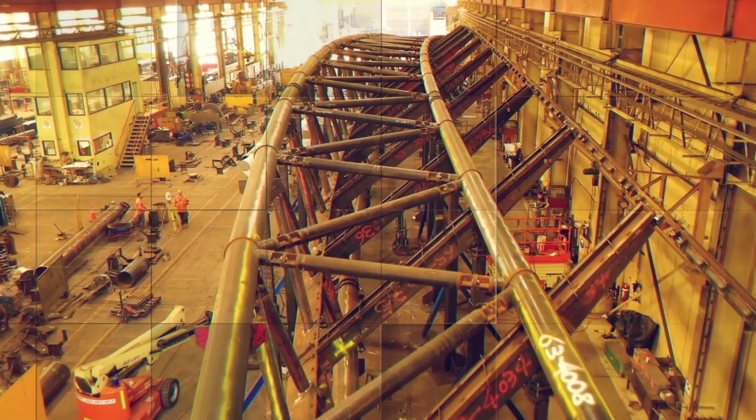Okay, let's proceed to our first category. Buildings, large projects. The shortlisted entries for the Buildings, large projects category are Allianz Stadium. The roof form and geometry are one of the most technically complex stadia roofs in Australia. It's lighter than traditional stadia, using up to 40% less steel, creating a more sustainable project. To achieve this result, the 2,000-tonne roof structure is shaped as a synclastic diagrid shell. This is being supported by 4 corner super columns, derricks.

Between the derricks are inner-arched trusses which span 140 metres and 90 metres in length, connected by large 260mm diameter pins. The structural design includes an outer tension ring and underlying columns which connect and support the roof to the stadium bowl steelwork.

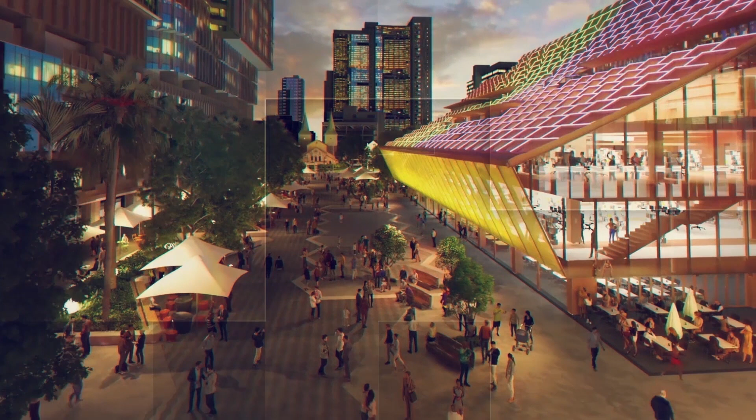5 Parramatta Square. The innovative triangular shape design is sculpted to match the course of the winter sun. A bespoke structural steel roof frame supports the envelope of the building, forming both the roof and facade. The structure comprises a series of framed portals running up the cascading floor plates with regular supports. Within the building, tessellated floors facing the square cascade downwards in an amphitheatre style, each with views to the square below. The city landmark comprises a library and cultural facility filled with community and exhibition spaces, as well as the City of Parramatta's council chambers.

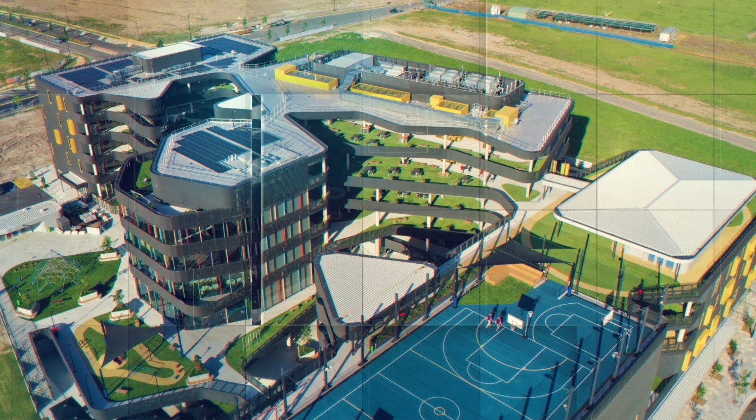Santa Sophia Catholic College. The college is a $150 million co-educational school accommodating up to 1,920 students. By embracing the principles of design for manufacture and assembly, a quick-build structural scheme was implemented. The school classroom modules were built from multi-storey structural steel framing with unpropped long-span metal deck flooring. This allowed for next-day fit-out to start in the classrooms following concrete slab pours. The use of steel was embraced across the project with architecturally exposed structural steel elements featured throughout the school.

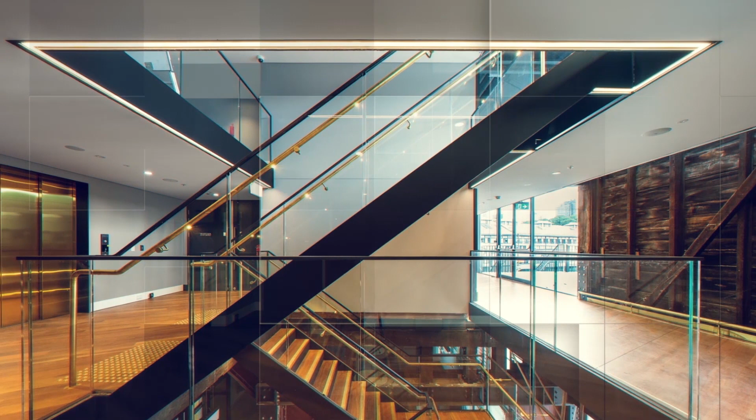Walsh Bay Arts Precinct. The heritage Walsh Bay Arts Precinct's existing structure had stood for over 110 years, and many elements of that structure were in poor condition. Steel reinforcement of the original timber structure was the only solution. Engineers were required to design special sections which would fit into the limited spaces. Limitations included trucks to 6-ton capacity and 8 metres long.

Almost 2,000 tonnes of steel then had to be moved virtually one stick at a time along the timber deck on trolleys pushed by manpower. In addition, barges were used to bring in larger 3D structures which were lifted into situ with barge-mounted cranes.

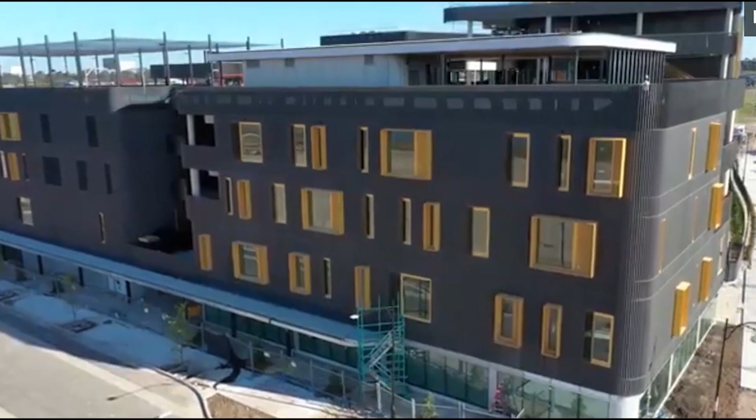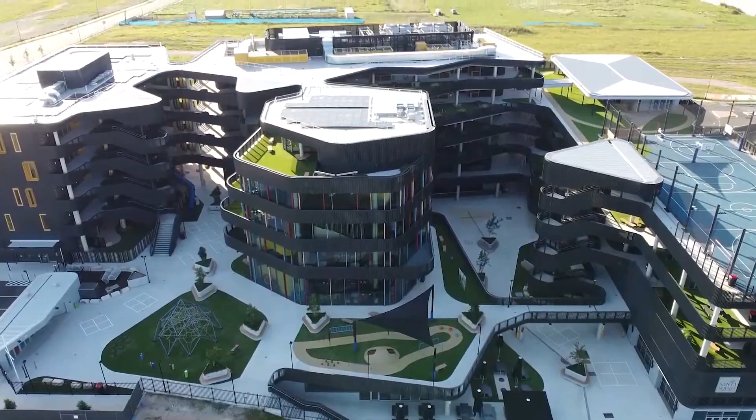The judges awarded a high commendation in this category. The high commendation is awarded to Santa Sophia Catholic College. Congratulations to Santa Sophia Catholic College.

And now for the winner of Buildings Large Projects for 2022. Allianz Stadium.

There's a lot of clever engineering that's gone into the structural engineering design, which has been fascinating. But what really strikes me is, at the end of the day, the simplicity and elegance of what we see when you stand here and look around is what's really special.

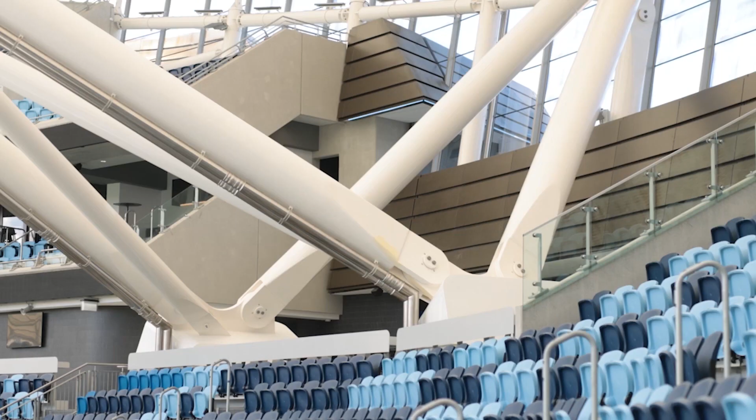Approximately 85% of all the steelwork of the roof was put together down here on the pitch and lifted into position. So the reason we modularise construction like that is to really minimise the time that you have to spend at heights. It's a safety thing as well as a time thing. So we really tried to design a smart system so that every single module was stable and could be lifted into position and done really quickly.

There were many aspects of teamwork and collaboration that were crucial to the success of the project. I mean, at many different levels, starting from our relationship and work we did with John Holland, listening to them, understanding what was important to them, to then work with them to achieve the outcomes, and then in parallel the clever engineering we did with our project partners, and then internally within our own teams, having the work being delivered from nearly 10 offices. All of these required collaboration and teamwork for where we've ended up today.

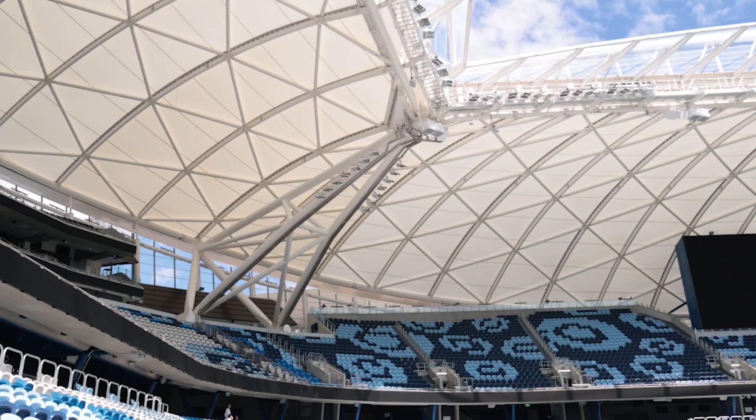So if you look at the roof and you see how complex yet elegant it is, steel is what makes that roof and makes it so special. Look, being recognised by your peers or industry for excellence is always very humbling. But I'm really proud to have been part of the team that has contributed to leaving this legacy which will be enjoyed by fans for years to come.

The next category is Building Small Projects. The shortlisted entries for the Building Small Projects category are Ashfield Aquatic Centre. This stunning centre provides a mix of community leisure and elite sports, housing 4 indoor and outdoor pools, a spa, sauna, steam room, gymnasium and cafe.

The complex steel design included 200 tonnes of structural steel and a high-end 3-coat protective coating system. The architectural intent for the main rafters was a fully boxed section which was manufactured from cap-plated universal beams. Due to rolling constraints and to meet architectural intent, the columns were manufactured from plate and assembled in the factory. Transport and site constraints meant that additional splice connections were required for the safe passage and installation of the steel.

Brewery Yard, Central Park. The creative and adaptive reuse of the former Irving Street Brewery offers a clear demonstration of structural innovation. The approach was to utilise as much existing structure as possible to help reduce construction costs and improve program times. The striking front facade of Building 30 consists of an existing 10-metre deep structural steel truss. The design incorporated this truss and other adjacent existing structural steel frames to form the structural lateral stability. Due to site access constraints, extensive analysis and coordination was carried out to ensure that the structural solution maximised buildability.

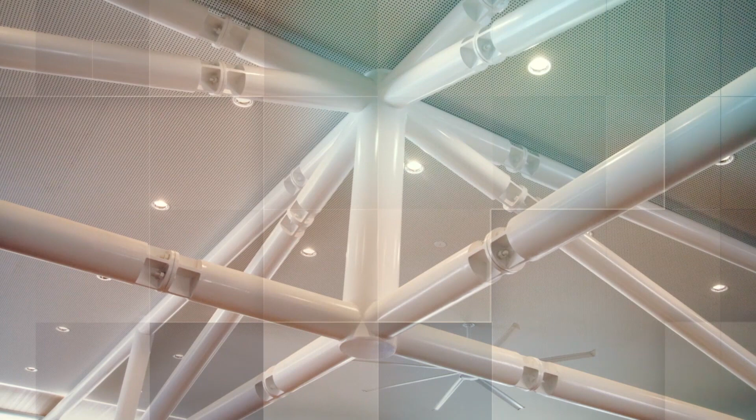Catherine McAuley Catholic Chapel. Visually welcoming, the chapel offers amenity including seating for 500, parish office, confessionals and back-of-house spaces. The development has been designed and constructed to an equivalent of 4-star Green Star standard. The intent is a reinterpretation of the traditional church within a contemporary social, environmental and economic context, and is a hybrid between a religious and community space. The large span overhangs are provided for amenity of both users walking around the building and provide passive shading. These large overhangs are held up with the large steel truss members, which are clearly detailed in form and pure white in colour.

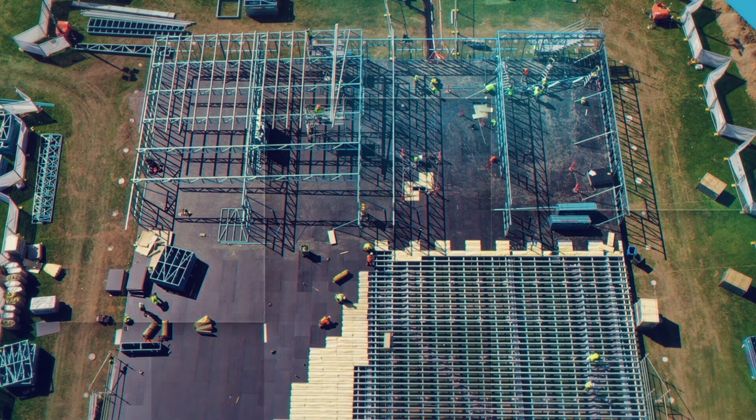COVID-19 Surge Centre. The relocatable COVID-19 surge facility was conceived and constructed with a 7-day design phase and 36-day construction time. The prefabricated floor and roof systems allowed the building to be enclosed and weathertight within days so that finishing and fit-out could begin. Design for manufacture and assembly approach offered several unique solutions to the demand of starting fabrication and construction before architectural and service designs were resolved. The light gauge steel design for the structure allowed it to be broken down again and containerised to be transported to a new site.

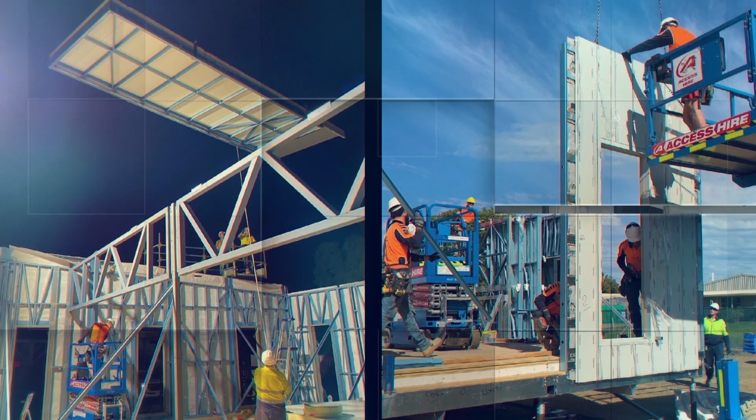CSIRO Clean Lab. The CSIRO required a new clean lab for their research centre on a leased site in Narrabri. Specific complexities of the project included laboratory conditions requiring the building to be airtight and the floor to have extremely low vibration tolerance, wall panels up to 6 metres high which required a custom solution for transport and delivery. The building also needed to be easily disassembled for removal from site at the end of the lease. Solutions included a prefabricated floor system, light gauge steel wall frames, prefabricated facade and roof panels, all providing a fast build time and accurate results.

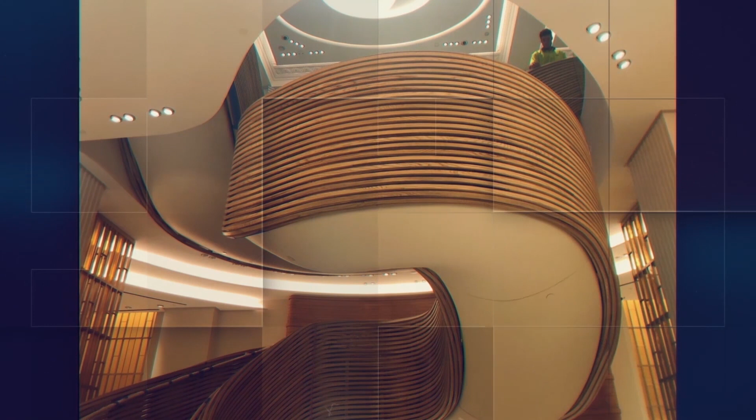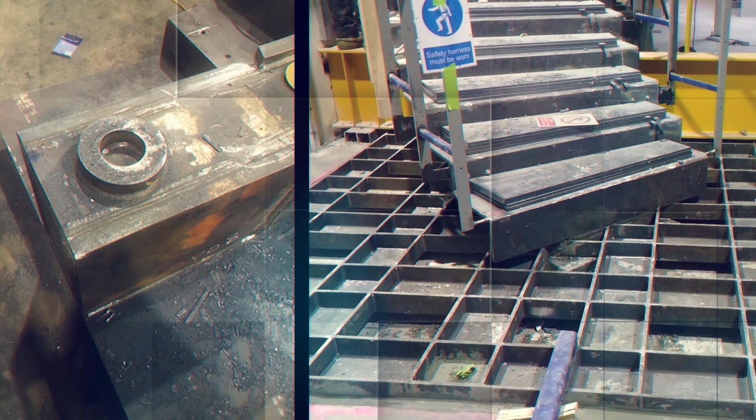Floating designer store staircase. The project's main design feature element involves the design and documentation of a very ambitious self-supporting helical structural steel stair which spanned the height of 2 equivalent stories. This required 2 suspended floating landings for BCA compliance and then separated into 2 independent flights at the upper transition. The design detail introduced a series of tuned mass dampers which were able to rectify dynamic issues while still achieving all of the design objectives. This is a wonderful example of excellence in steel design, engineering and construction while dealing with the constraints of an existing heritage-listed building.

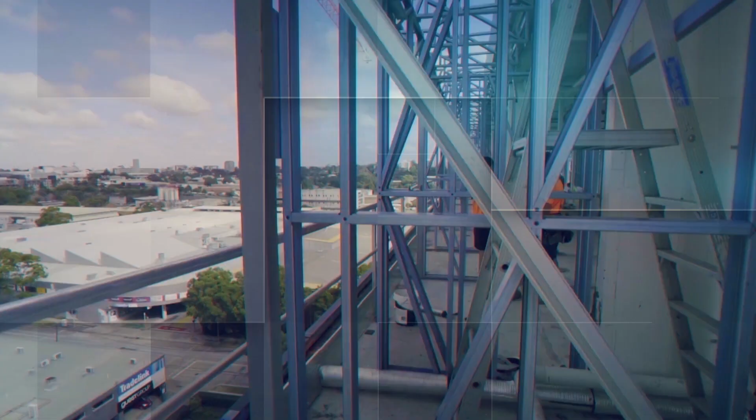Northside Clinic. How do you build another level on top of an operational health facility without disrupting the running of the facility or disturbing the staff and patients? By utilising a design for manufacture and assembly approach, the scope included prefabricated facade panels to the top level to match existing and top-level prefabricated wall and roof framing to sit on the existing roof slab.

The prefabricated facade panels with box window detail were framed off-site, assembled and clad on-site at ground level, lifted into place and fitted from the existing roof level. This resulted in limited preliminary site costs, truck movements and waste.

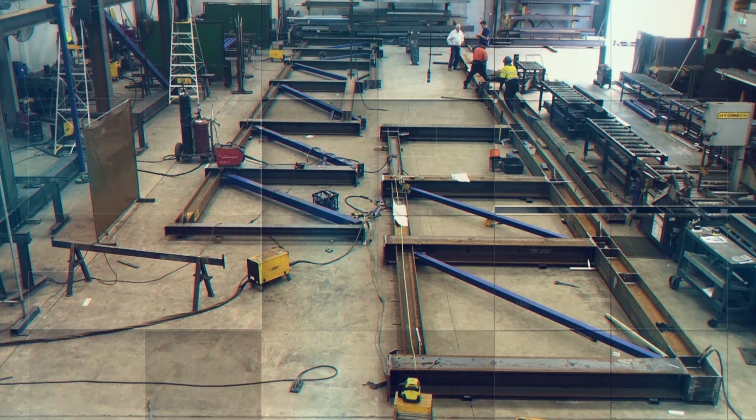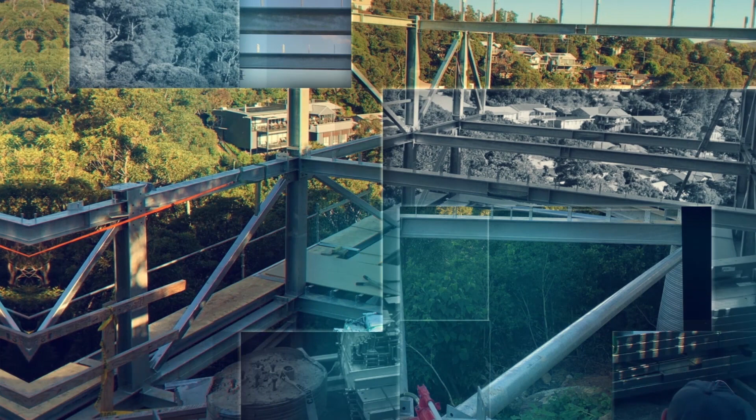Oceano. A spectacular location set the scene for an ambitious cantilevered house designed to float above the tree line. Fabricated trusses for the long sides of the home created the double-storey structural walls. The built-in platforms around 3 sides of the house also negated the need for any scaffold.

Once the first level of trusses and secondary members, including cold-rolled joists, were installed, the flooring then created a safe working platform. With its proximity to the ocean, all structural elements were galvanised. BIM models were shared for collaboration and a 3D model used for erection.

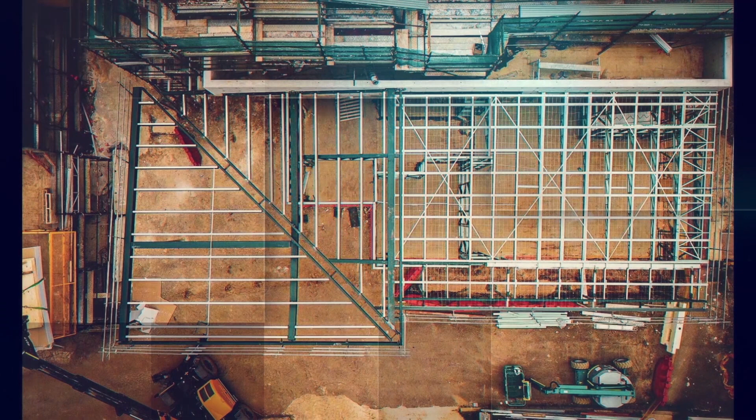Opal Glenmore Park. This intricate project is a perfect example of applying solutions of structural and light gauge steel in combination, maximising the architectural feature and achieving high productivity and cost efficiency. Utilisation of a high-level BIM model with integration of lightweight and structural steel set the platform for seamless coordination with consultants and the builder and has minimised error and cost on site.

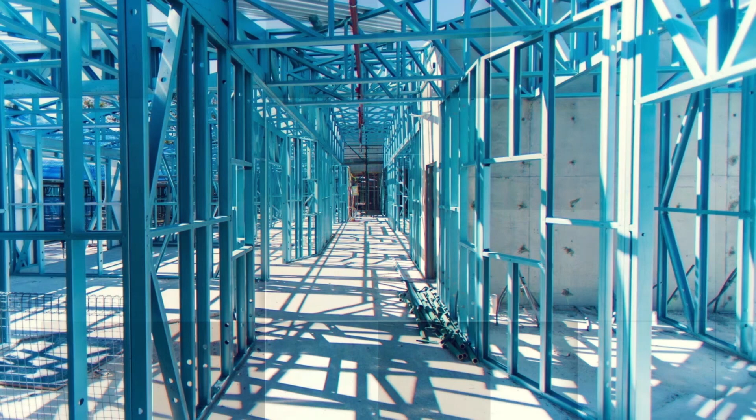A lightweight purlin design for an efficient ceiling void provided flexibility for services, while the rim beam design is fully compliant to fire rating regulation and achieved great cost reduction in engineering.

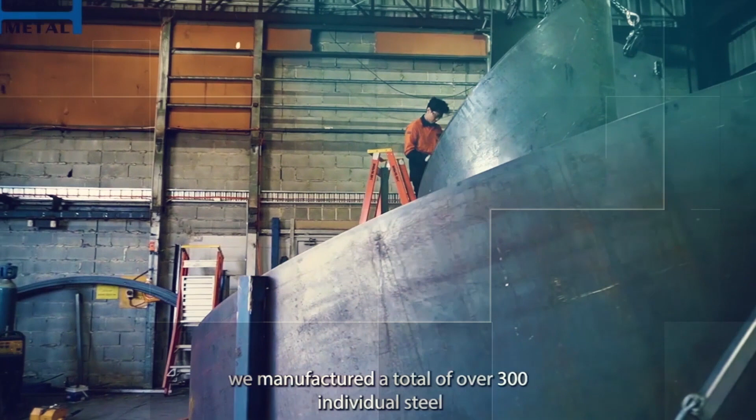Quay Quarter Tower Spiral Stair. Quay Quarter Tower is the redevelopment of the former AMP Tower at 50 Bridge Street, Sydney. The design required the fabrication and installation of 3 sets of spiral stairs, the largest of which spans 9 floors and forms the architectural centrepiece of the 21 to 29 floor atrium.

The design and drafting team commissioned a 3D printed scale replica of the stair sections based on the BIM model. This was used to design a custom lifting rig which could hold each 10-ton asymmetrical shaped section of stairs in perfect balance, and also calculate the logistics of transporting these huge sections.

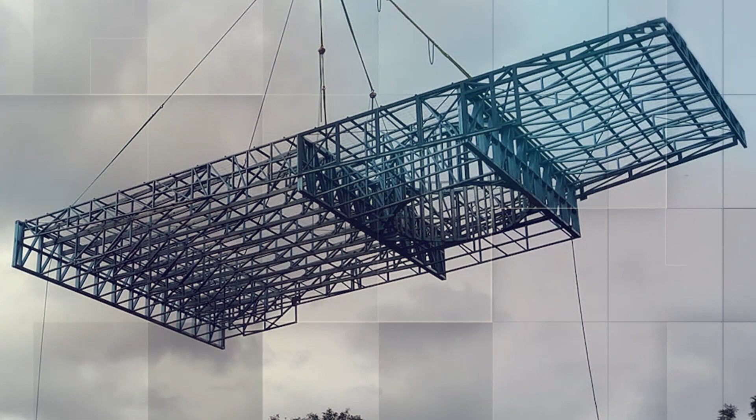Smalls Road Public School. School design is reaching new levels of creativity in construction, and light gauge steel framing solutions in tandem with design for manufacture and assembly is helping the project team to compress build times and cost milestones. A cleverly designed panelised framing system allowed building works, slabs and structure to be constructed on site, whilst the wall and roof framing was being fabricated off-site.

The roof framing was designed to be installed in large panels via crane, and wall framing was fabricated in panels to speed up installation time. Waste was minimised by designing and fabricating off-site using precision drafting and manufacturing software.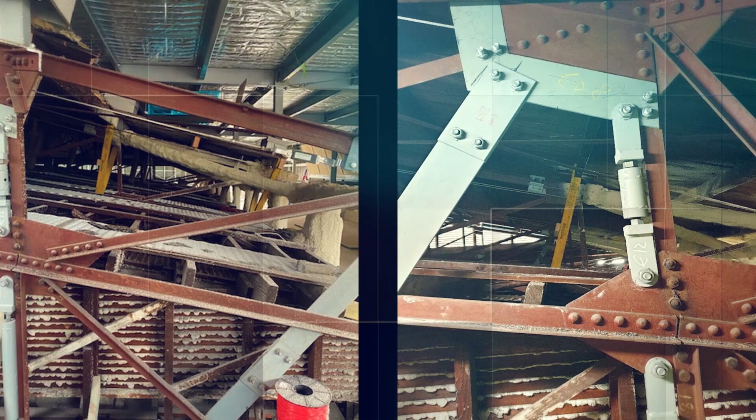Yirranma Place. This project involved the restoration of the existing 1927 heritage building and additions to transform the structure into a collaborative office space and community hub. Works included strengthening the existing steel skeleton structure, particularly the 34-metre roof trusses, to withstand higher loads of the additional office space.

Supporting the existing building using a temporary configurable truss structure for excavation of the basement. The design and implementation of a transfer structure to remove an obstructing masonry wall which was 14 metres high and 48 metres wide, and design the seamless transition from the old to the innovative new.

The judges awarded a high commendation in this category. The high commendation is Quay Quarter Tower Spiral Stair. Congratulations, Quay Quarter Tower Spiral Stairs. And now for the winner for Buildings Small Projects 2022.

Oceano. The most challenging aspect of this project, but also what we're most proud of, is the installation. Typically installing steel on the side of a hill is challenging enough, but throw in a battle axe block, one-way tight access, no room for EWPs, 55 tonne of steel with sections weighing up to 5 tonne, and a cantilevered house, we had our work cut out for us.

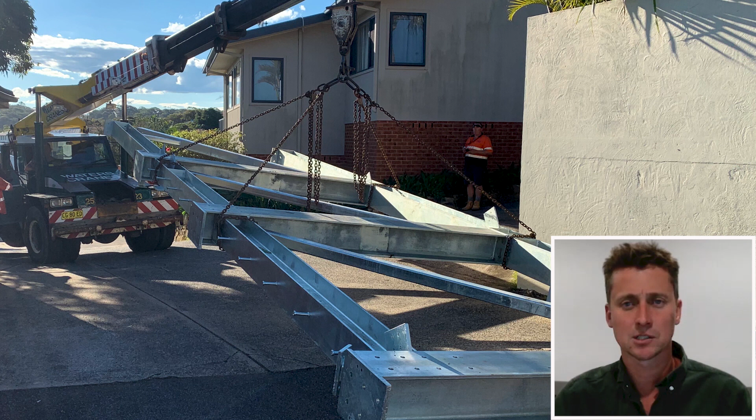The site was perfect for steel. Large, prefabricated, welded truss sections could cantilever over the tree canopy. Being able to construct the truss in such large sections meant that the house could be constructed quickly and safely.

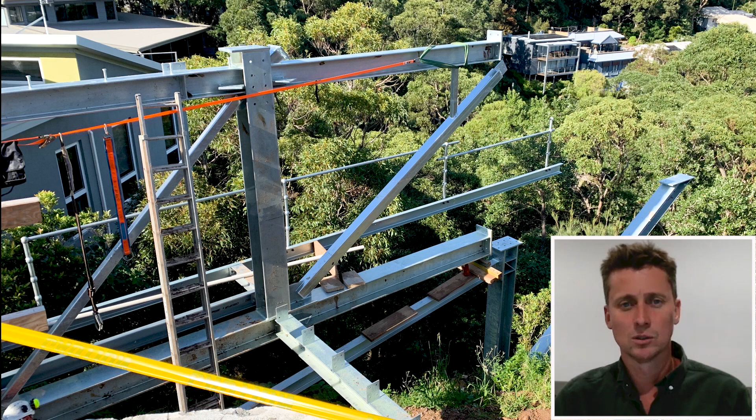To ensure ease of install, it was paramount that the trusses with multiple connection points, less than 2mm clearance for bolt holes, could be bolted together with ease. Pre-assembling the truss in the factory before welding off gave us peace of mind for a snug fit on site. Furthermore, the weight and size of the members in respect to galvanising, transport, access to the workplace and crane capacity had to be front of mind.

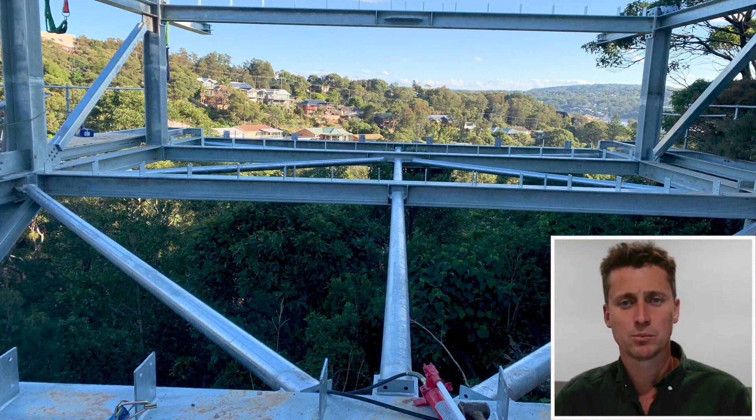Collaborating with the engineer, our detailer Innovators and the builder JCP Constructions to ensure we considered all elements from fabrication to install was vital. We thank Innovators for another perfectly detailed project and JCP for giving us the opportunity and support throughout the build. Importantly, I acknowledge and thank Coastal Steel employees, our subcontractors, including Waters, Cranes and Jeff Steer Transport, for all the hard work and problem solving.

The project was always intended to showcase steel as its primary material. Along with being the key structural element, the galvanised steel is exposed on the exterior and interior and makes for an impressive sight, as from below it appears to float above the tree line. We're extremely honoured and proud to win this award and believe it's recognition for all the hard work and many hours spent to deliver a successful project. Congratulations to Oceano.

Our next category is Steel-clad Structures. The winner for Steel-clad Structures 2022 is CSIRO Clean Lab. The CSIRO's new Research Clean Lab facility is located in Narrabri in regional New South Wales. The design for manufacture approach delivered this complex building with certainty and quality. The beauty of steel cladding not only achieved the desired aesthetics, but also provided the solutions to meet requirements for pre-assembly of the 6-metre high wall panels for transportation.

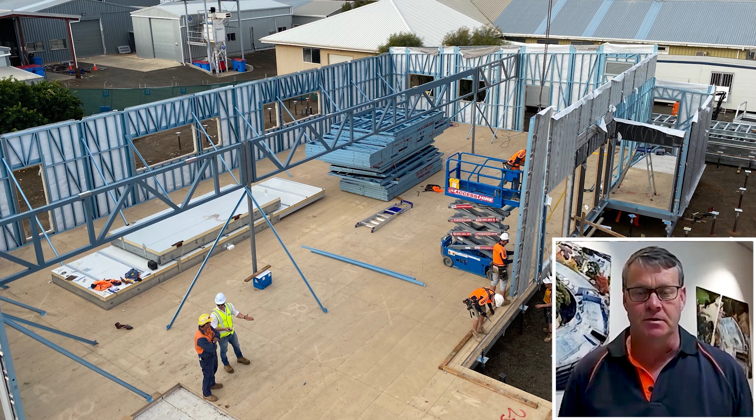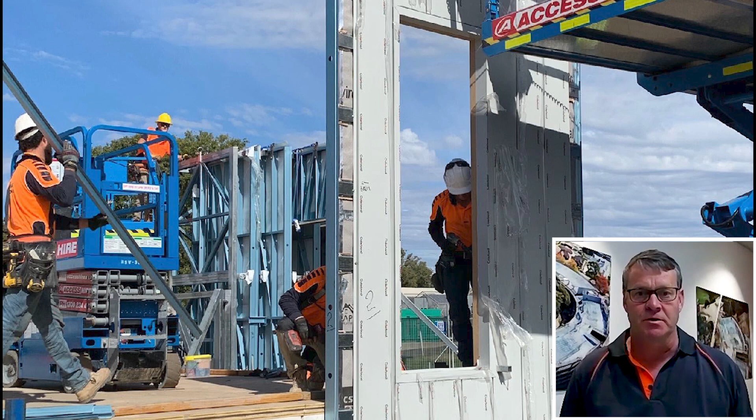This project was one of the most complex projects this business has ever delivered. We had to build a full-scale laboratory with high KPA floor loads, prefabricated in Mittagong and delivered to Narrabri in New South Wales through the depths of COVID-19. We had massive challenges with the supply of materials for all aspects of this project. We had to be highly coordinated with our suppliers for the supply of steel in this project, and the depth of our supply chain was the only way that we could accomplish this project in the time frame and to the quality that we achieved.

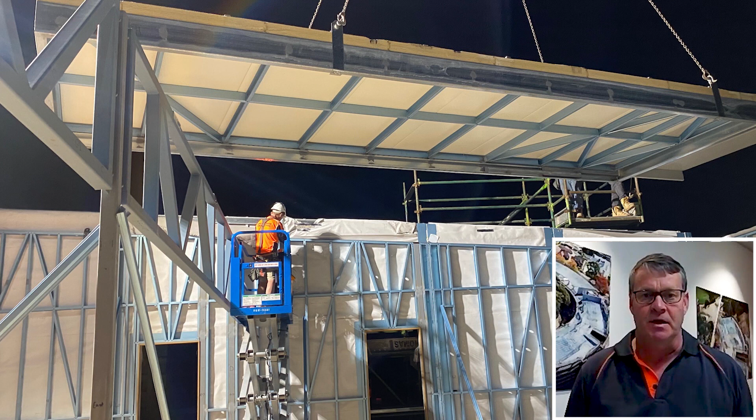Our relationship with the builder FKG was the only way that this project could be achieved with the expediency and efficiency that was delivered throughout the project. The levels of coordination with mechanical services and electrical services throughout the project made it quite difficult to accommodate, but with the work of both parties, FKG and Austrust and the other services contractors, we got to a completion of a successful project. Using steel for this project gave us the flexibility to adapt and get bigger spans and have transportable sections that we could confidently package and deliver from Mittagong to Narrabri.

We're proud to accept this award because it's a culmination of a number of years' worth of development of a direction that this business is proceeding in, and a benefit to the industry and isolated projects that are completed in remote locations with the standards and quality of what the country should expect to receive. I'm incredibly proud of our team for the process of the design and the delivery of this project. Congratulations, CSIRO Clean Lab. The sponsor for Innovative Cold Form Steel Buildings category is BlueScope TrueCore and Nash.

The next category is Innovative Cold Form Steel Buildings. COVID-19 Surge Centre, Canberra. In a time of crisis, this new 1,700 square metre health facility was conceived and constructed within 5 weeks. Prefabrication was key to achieving this extraordinary result, with light gauge steel framing providing accurate solutions for wall, floor and roof framing. The innovative steel framing also provided for the necessity to be able to disassemble the project for relocation at a future date.

Crown Towers, Barangaroo. The Crown Towers apartment project required a solution for stud walling and a curved entry wall to be clad in stone. Deflection limitations were a critical consideration for the brittle cladding joints. Significant design and testing were undertaken to address the abatement of noisy stud syndrome experienced in some structures. This included an increase in stud sizes with a complementary reduction in gauge. Additional nogging tracks to double-sided lined walls reduced the clamping action of the wall linings and minimised wall panel movement associated with possible structure movement.

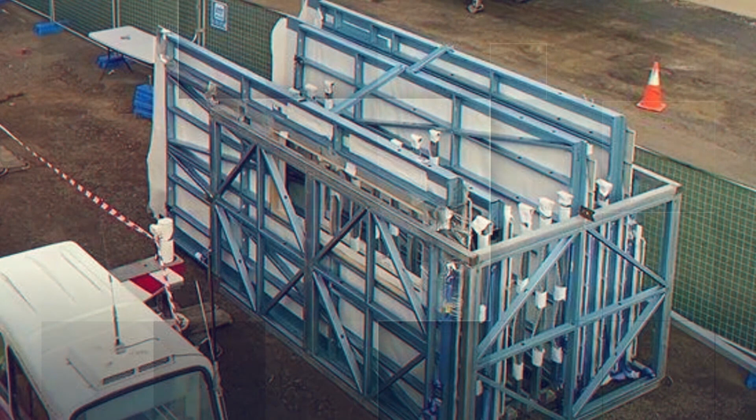CSIRO Clean Lab. With the CSIRO's requirement for a new Clean Lab Research Centre, light gauge steel framing addressed complexities of the project. Low vibration tolerances were a design necessity to meet the sensitive laboratory conditions. Steel framing was ideal to meet the pre-assembly and transportation of panels to suit the walls, floor and roofing. Specialised systems were also designed to facilitate the transport of the prefabricated kit of parts. A fast construction timetable was achieved, and smart building design provides the platform for future relocation.

Northside Clinic. The high-strength rigidity and lightweight properties of cold-formed steel has met the design intent for this prestigious facility, achieving reduced loads on the existing structure. With vibration and noise limitations critical for the existing medical practice to operate, pre-assembly of frames off-site achieves the brief. Ability to clad the facade panels prior to installation set the scene for safer installation and a speedy build program.

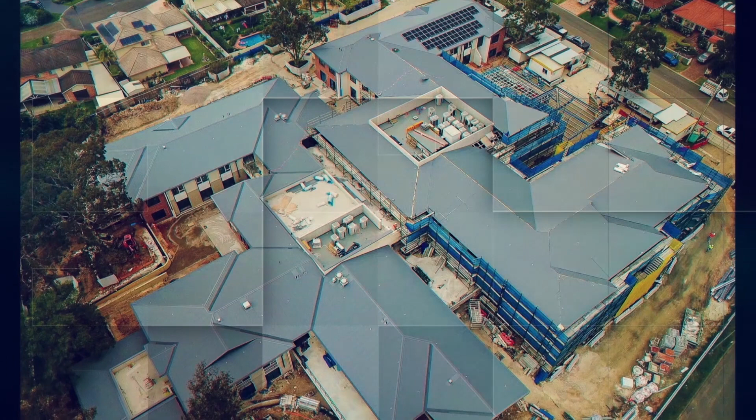Opal Glenmore Park. The combination of light gauge steel framing and structural steel has provided solutions for this large care facility. The construction design was not only extremely cost efficient, but it also provided the ease to achieve the architecturally complicated roof features. Lightweight purlins were designed to provide a greater ceiling void, creating flexibility for services. With the trend of steel design using high-level BIM models, the seamless coordination of all site participants ensures an efficient build with safer outcomes.

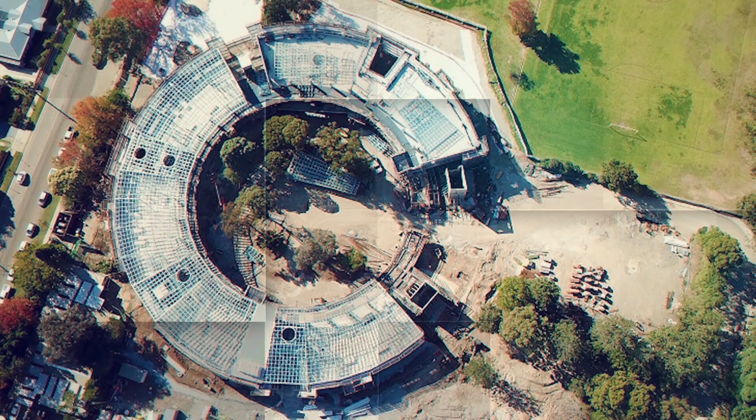Smalls Road Public School. This 3-storey circular public school set new standards for educational facilities in New South Wales. Intelligent design, incorporating a panelised steel framing system, allowed for off-site modules to be installed in quick succession. The large, lightweight roof frames were designed to be installed in sections to create the circular intent, while supporting wall frames were also prefabricated to speed up installation time. The result is an architecturally stunning facility for future generations to come together to mix and to learn. The winner for 2022 in this category is...

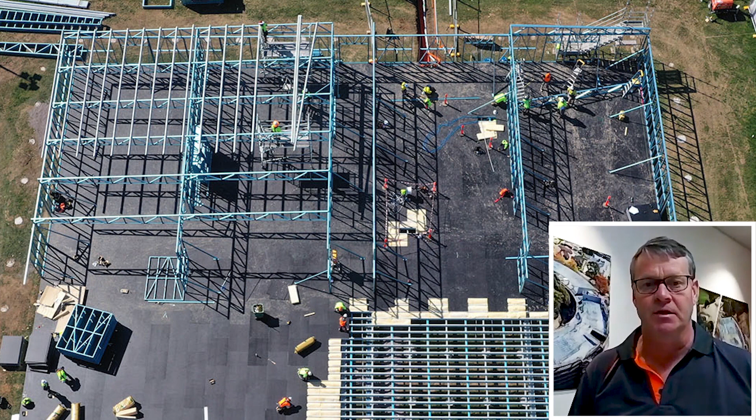COVID-19 Surge Centre. This project stretched our team to another level. We had to be in production from the date of an order on a Tuesday. We had to be in production on Easter Friday, Saturday. We had the Sunday off and we're still in production on the Monday. Our team committed to this project and we delivered. COVID was a challenge during this project, and we had to make sure that we had enough supply chain of steel to deliver this project in the expedited manner that it was required to create our social benefit for the community.

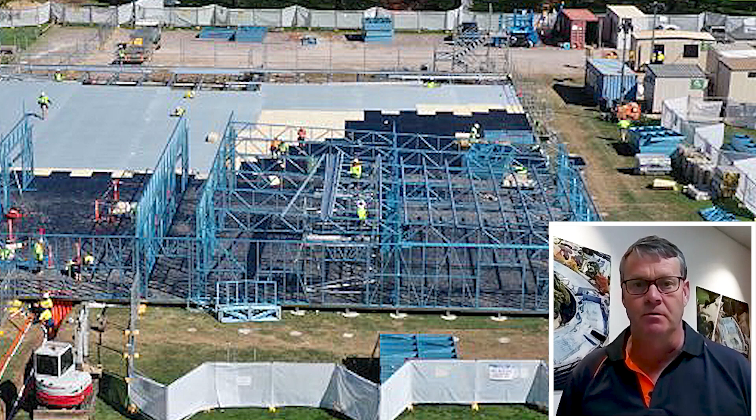The speed of trust that was evident between Mantina, AusTrust and the rest of the contractors on this project was the standout in the delivery of it. Without that speed of trust, this project would not have been delivered in the 5-week period that it was. Steel as a material gave us the flexibility to create telescopic walls that would let the building grow and reduce, as the design was not finalised when we started production. So we had no fixed floor plan, so we had to be flexible, and steel gave us that benefit of being flexible. We as a business are incredibly proud to receive this award for the time and effort that was put in by the team to deliver this project. Congratulations to COVID-19 Surge Centre.

Our next category is Engineering Projects. The shortlisted entries for the Engineering Projects category are Central Station Northern Concourse Roof. This magnificent roof structure spans from platform 8 to 16 and sits 16 metres above the ground. The 80-metre long, 40-metre wide roof has diamond-shaped openings to allow natural light to filter through into the station. The roof comprises 342 tonnes of permanent steelwork and 45 tonnes of temporary steelwork and propping.

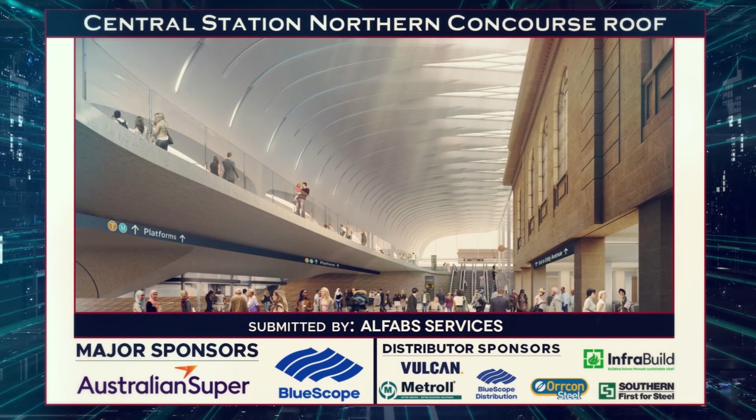A pre-assembly yard was created and was key to delivering an accurate pre-assembly of the roof. The installation sequence included temporary roof support towers followed by the hockey stick girders. The rafters and linking beams were next, and final installation of the roof cassettes after a survey alignment of the primary structure.

Rozelle Interchange. The Green Link Bridge is a landscaped, shared user path spanning City Westlink and the Crescent. The bridge measures 116 metres in length, 15 metres in width, and features 8 main segments, which were fabricated and transported to site. It's designed as a landscaped structure with small trees, grasses and ground cover plants lining the edges. The strength and durability of the structure was achieved through a range of design innovations, including innovative amalgamation of structural steelwork. Long bolted outriggers extend from the composite tub girders, offering high strength and durability while reducing the need for additional girders.

Specialist wind turbine anchor cage solution. An anchor cage is used as a foundation cage to anchor the wind tower to its concrete foundation. This innovative design removes the need for the non-biodegradable grout pocket forming inserts, replacing it with reusable and recycled metal top forming rings. Only 10 top forming rings are needed, irrespective of the number of towers on a project.

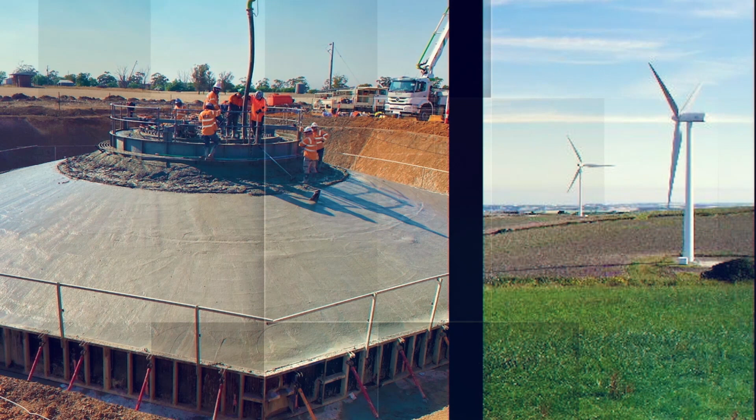The top forming rings enable the delivery of fully assembled 1/4 sections, ready to drop accurately into position. This dramatically reduces construction time and costs, as the 1/4 sections can be assembled on site with 2 people and a crane in under 2 hours.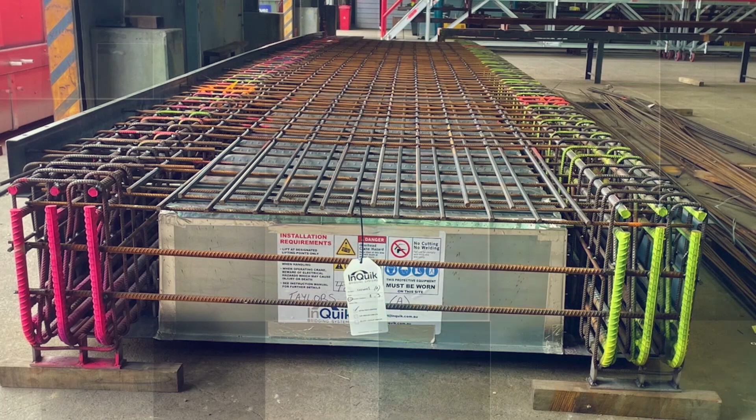Terral Bridge. Linking the Homestead Precinct and Western Floodplain Viewing Platform, the design incorporates weathering steel cladding, which embodies the desired culture and aesthetic requirements. The InQuik bridge system is a semi-modular bridge solution providing a 100-year design life. The bridge system was developed to maximise quality through prefabrication and for ease of transportation as lightweight modules and installation.

The bridge panels are self-supporting, and during the concrete pour, the trusses carry their own weight plus the formwork. The concrete cures in a neutral state, supported by the steel, allowing full compressive and tensile strength of the concrete to be retained for live loads.

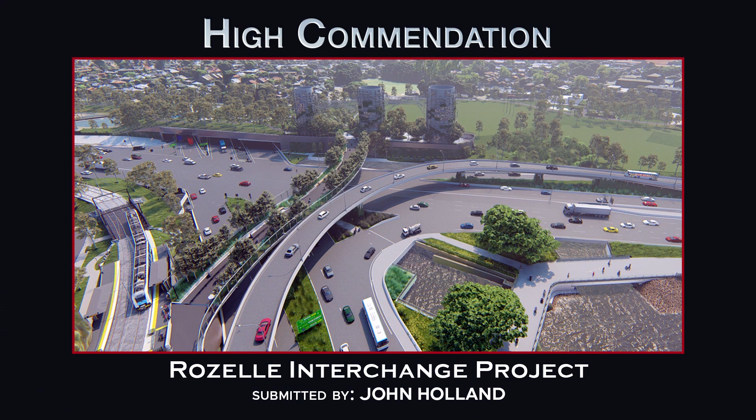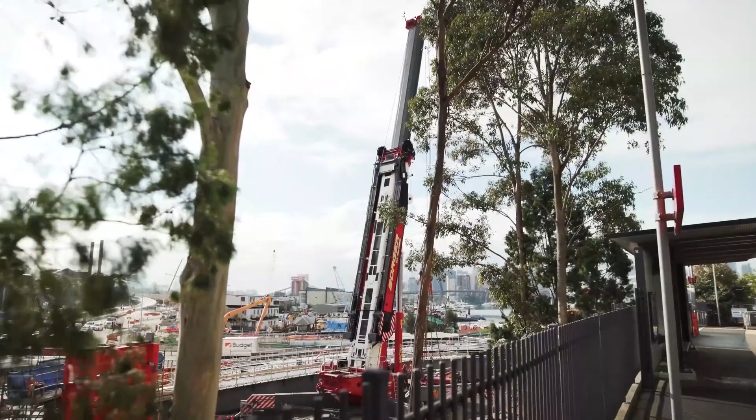The judges have awarded 2 high commendations for this category. The first high commendation is Rozelle Interchange. Congratulations, Rozelle Interchange Project. The second high commendation for this category is Terral Bridge.

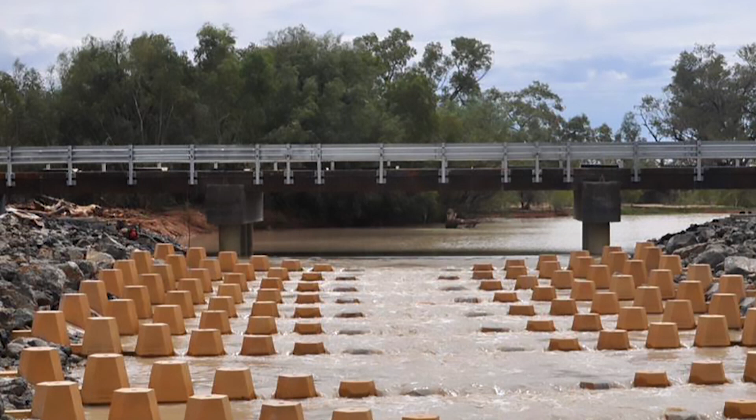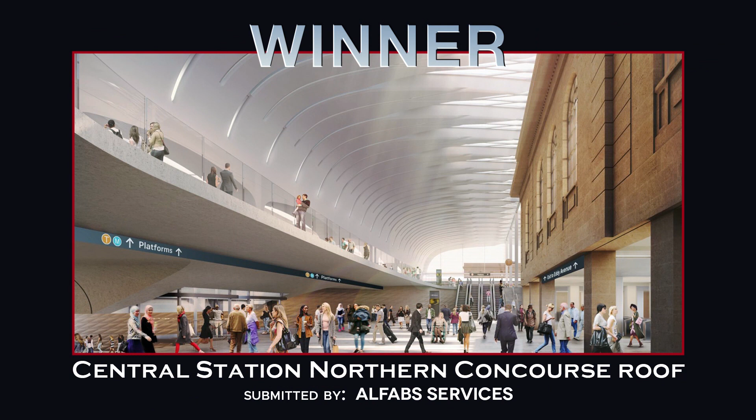Congratulations to Terral Bridge. Our winner for 2022 in this category is Central Station Northern Concourse Roof. To be able to walk through such an iconic facility, look up and know that our steel is in the structure of the largest and busiest railway station in Australia forever is a source of great pride.

Rail possession provided a very limited time frame for works, so we had to come up with a modular fabrication and pre-assembly to enable final installation within a 48-hour period. To address this challenge, we fabricated the roof into modules, which were then fitted out with all cladding, glazing, electrical and plumbing prior to transport and installation.

One of the additional measures we implemented was to again pre-build Bay 4, comprising of 8 individual lifts into a complete module for final installation on a single night shift during the week. We engaged early with our client, Laing O'Rourke, to optimise the design for efficient fabrication and installation.

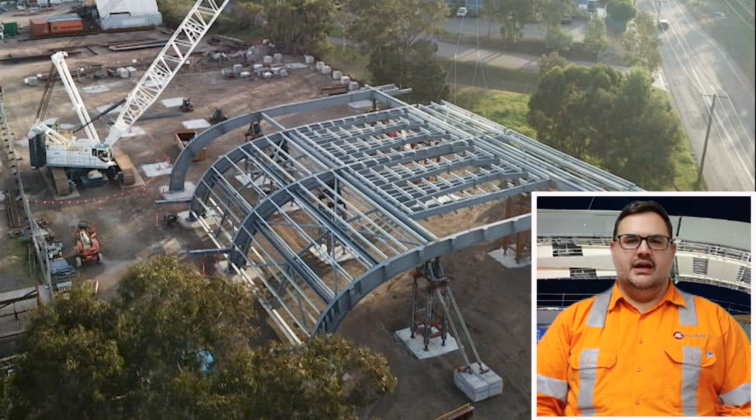We established an assembly yard and client site office on our premises to collaborate with Laing O'Rourke for all fabrication, coatings, pre-assembly and disassembly. Our Alfabs transport team then transported the modules to Sydney for Alfabs Site Services installers. The versatility of steel with its high strength to weight ratio made it the ideal material for timely fabrication and erection. We are able to fabricate steel across large self-supporting spans without relying on the existing heritage structure for support.

The pre-assembly of the roof in our yard gave everyone the confidence to maximise safety and production during the possession windows. Steel is one of the few products that could allow this process to happen successfully. We're proud to be a local, family-owned company. This award forms part of Alfabs' journey, after years of establishing customer-focused management systems to collaborate on Tier 1 large infrastructure projects. This validates our dedication to our Alfabs people, clients, and our continuous commitment to safety, quality, and delivery. Congratulations, Central Station Northern Concourse Roof.

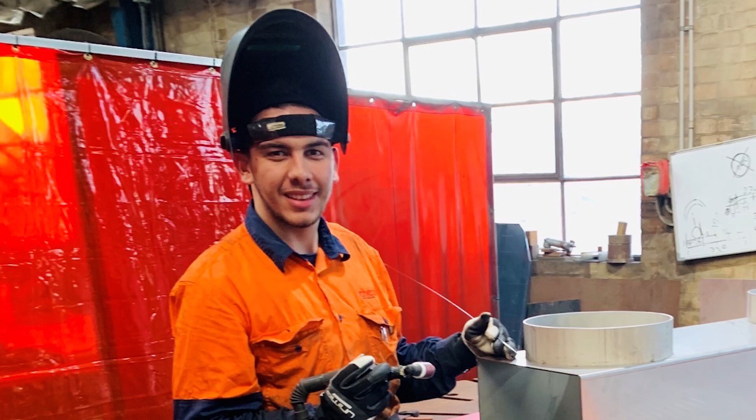Our next category is Young Designer, Detailer, Tradesperson. The winner for 2022 is Jude Barrow. Starting his career at 14 in his father's metal workshop in Syria, Jude had taken on this responsibility as his father became disabled after an accident. Jude was successful in securing an apprenticeship and commenced working at Chess Engineering in 2020. Jude has progressed to leading hand in the sheet metal works and plans to pursue pressure welding certificates before he finishes his apprenticeship.

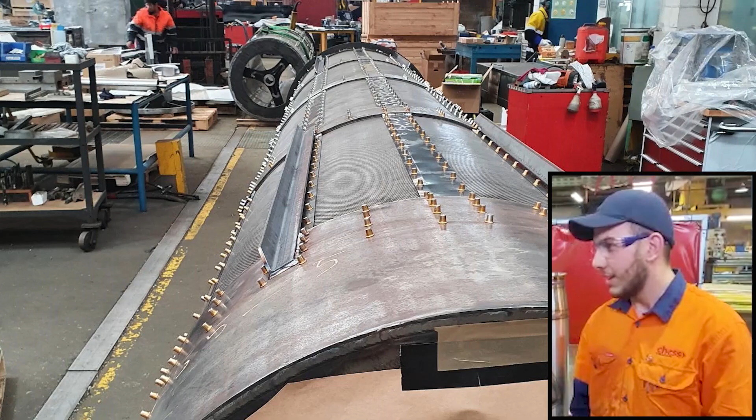What do you enjoy the most about working in the steel industry? The stainless steel work, TIG welding. What are you most proud of? The oven reel, rolling the oven reel, the big job. What do you hope to accomplish over your career? I'd like to be the supervisor in Chess Engineering. Even I'd like to run my own business. Yeah. How does it make you feel to win this award? That makes me so happy and makes me work so hard for Chess and for myself. Very good. All right, well, congratulations on winning the award. Thank you. Okay, thank you.

Congratulations to Jude Barrow. Well, that concludes the Steel Excellence Awards for 2022 for New South Wales. Congratulations to all our high commendations and our winners. I sincerely thank everyone who contributed their fantastic projects into this year's program. Don't forget that the winners from each category will vie for national honours against their state counterparts at the National Awards Gala Dinner on November 22nd in Sydney.